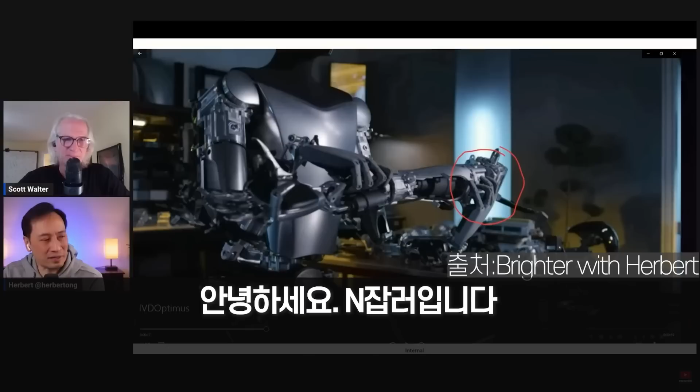인터뷰의 주된 내용은 테슬라 로봇인 옵티머스의 디자인과 실제 적용에 관한 구체적인 분석이었습니다. 인터뷰에서 스캇은 테슬라 차량을 만드는데 이미 테슬라봇이 쓰이고 있으며 2023년 말까지 500대 이상의 테슬라봇이 공장에 투입될 것이라고 예측했는데요. 오늘은 로봇공학자의 시선으로 바라본 테슬라봇의 디자인과 그 활용방식, 그리고 이로 인해 발생하는 엄청난 비용 절감에 대해 자세히 알아보도록 하겠습니다.

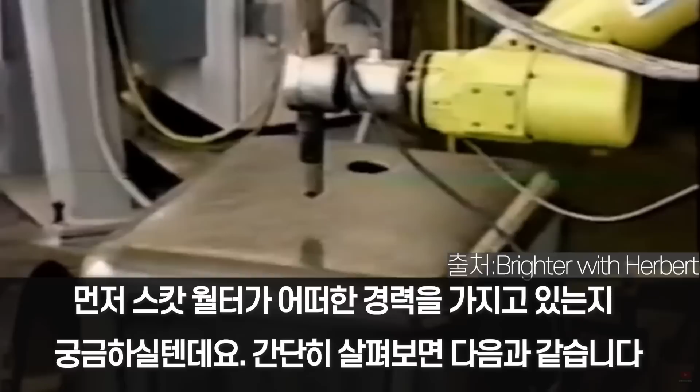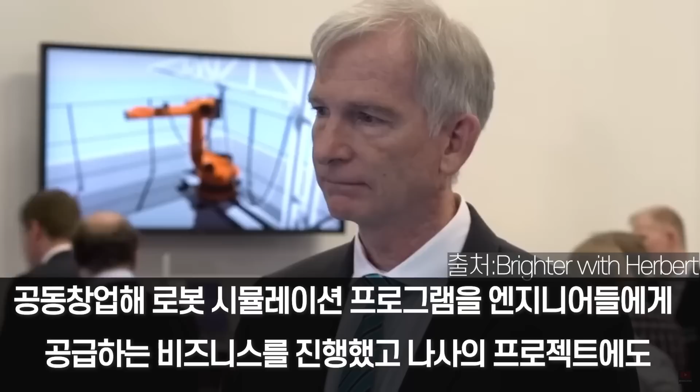먼저 스캇월터가 어떠한 경력을 가지고 있는지 궁금하실 텐데요. 간단히 살펴보면 다음과 같습니다. 스캇은 에어로스페이스 엔지니어로 기계공학 박사학위를 가지고 있으며 더넵 로보틱스의 공동 창업자로 초창기 로봇을 이용한 공정 설계 및 시뮬레이션 분야에서 선두자 역할을 했습니다. 스캇은 이후 비주얼 컴포넌트를 공동 창업해 로봇 시뮬레이션 프로그램을 엔지니어들에게 공급하는 비즈니스를 진행했고, 나사의 프로젝트에도 일원으로 참여해 자동화 로봇 기계 설계 및 개발에 많은 도움을 주었습니다.

인터뷰 초반 스캇은 자신이 만든 영상을 보여주며 테슬라봇은 많은 사람들이 생각하는 복잡한 작업이 아닌 영상과 같은 단순한 작업이지만 자동화가 어렵거나 사람이 접근하기에 위험한 공정에 사용될 것이라고 말합니다. 또한 그는 왜 이러한 로봇의 투입이 현재에도 이미 진행되고 있을 것 같은지 여러 가지 데이터를 통해 설명하겠다고 언급하는데요. 이와 관련해 인터뷰 진행자인 헐버트는 스캇에게 다음과 같은 질문을 합니다.

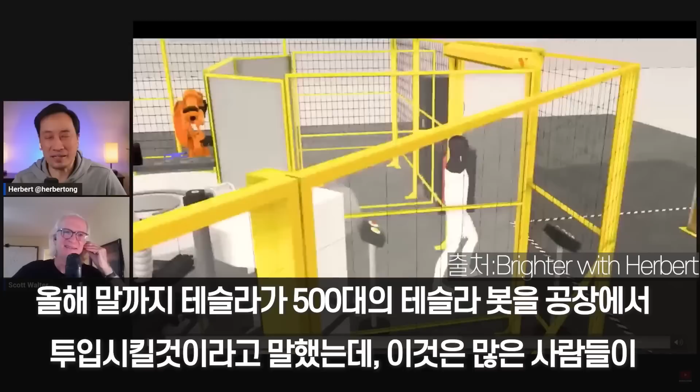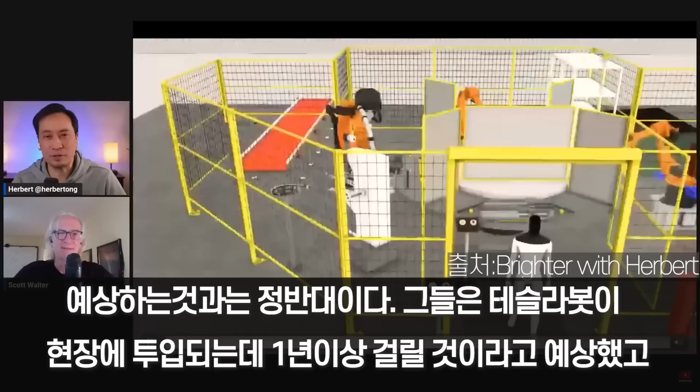You told me that you believe that today, that by the end of this year, there's going to be 500 bots, Tesla bots, and that they're already going to be starting in the factory. This is completely opposite of what many people have been saying, that it's going to take years. Don't expect the Tesla bot is going to be a business that's going to be available right away. Why did you believe this?

이에 대한 답으로 스캇은 이는 세 글자로 충분히 설명 가능하다고 말하며 FSD 때문이다 라고 말합니다. 그는 FSD가 발전하는 방식에는 다수의 차량과 이들의 주행 데이터를 필요로 한다고 말하며 테슬라 차량과 같은 FSD를 사용하는 옵티머스 또한 많은 데이터를 필요로 한다고 말합니다. 또한 그는 이렇게 주장하는 건 나뿐만이 아니라고 설명하며 랜디 컬키는 강의에서 1000개 이상의 테슬라봇이 투입되고 있을 것이라고 예상했고, 조 미나레토 또한 테슬라는 최소 100대 이상인 테슬라봇의 데이터가 필요할 것이다 라고 말했다고 전합니다.

You need a significant number to be able to get enough data on the operations of the robots, how to do it. Now, another thing which may be shocking is when I saw this, I put out a tweet saying that I want to reserve the first Tesla car to come off the line that had anything built with Optimus. And I'm afraid I might be too late. Not because someone else reserved it, but it might already be out there. What? It could be. I mean, there are so many operations. We may not know it. It could just be something simple. They just loaded a part into a machine and something happened and took it off, and that ended up becoming part of the car. So we may already have Tesla vehicles out there that have been built with Optimus.

이런 충격적인 얘기와 더불어 스캇은 테슬라 AI 데이에서 공개된 자료 한 가지를 보여줍니다.

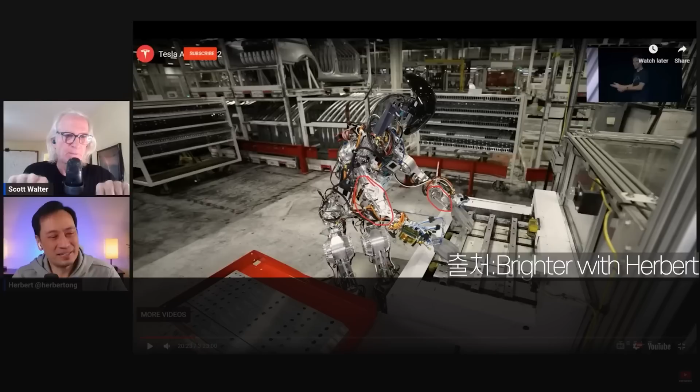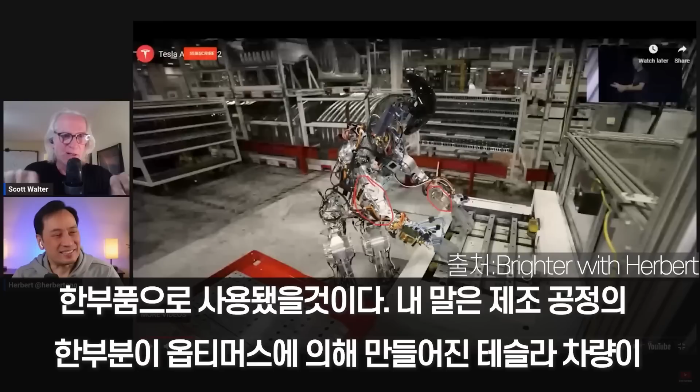Look very closely. I want to ask everyone in your audience, does that look like a laboratory environment? It does not. It's a factory, but you know, I mean, production. It looks like it's late at night. There's no one around there. They made sure no one could see, but they are testing this on the floor already. Do you see what's going on there? That is an actual production operation that has to be done. I guess those parts are real parts that is coming out of that machine, and Optimus has picked it up and put that on the red tray, and then that's been used somewhere else, and it has ended up in a Tesla. I'm telling you, there are already cars on the road where one of the process steps was done by Optimus.

또한 스캇은 테슬라 로봇의 구조적 디자인에 대해 자세히 분석했는데요.

특히 옵티머스의 팔에 달린 액추에이터를 주목했습니다. 스캇은 일반적으로 인간은 팔에 7가지의 자유도를 가지고 있지만 옵티머스는 6개의 자유도를 가지고 있었다고 말하며 손목 부분의 액추에이터를 어떻게 간소화했는지 궁금했다고 언급합니다. 그리고는 AI 데이 초대장을 보고 이를 분석한 결과물을 공유했는데요. 그는 다음의 영상을 보여주며 2개의 액추에이터로 손목의 모든 동작을 수행하도록 만든 테슬라의 기술력에 감탄했다고 말합니다. 그리고 이러한 제조 공정의 단순화는 옵티머스의 생산 비용을 상당히 낮춰줄 것이라고 추가적으로 언급했습니다.

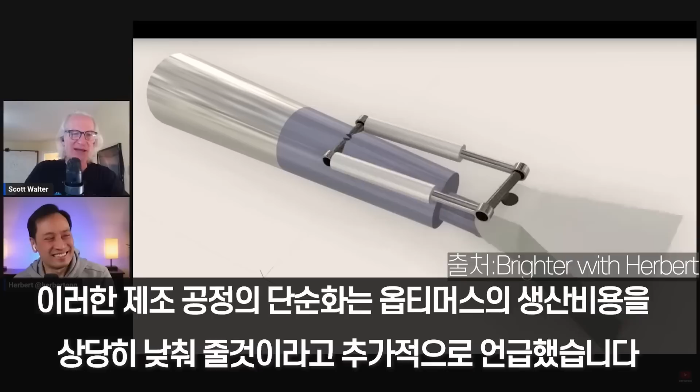또한 스캇은 옵티머스의 팔에 대한 설명과 더불어 손의 디자인에 대해서도 언급하며 다음과 같이 말합니다.

What's hard about a walking robot, a humanoid robot, is not the walking, but walking with a load. We've already solved, we can make a robot walk.

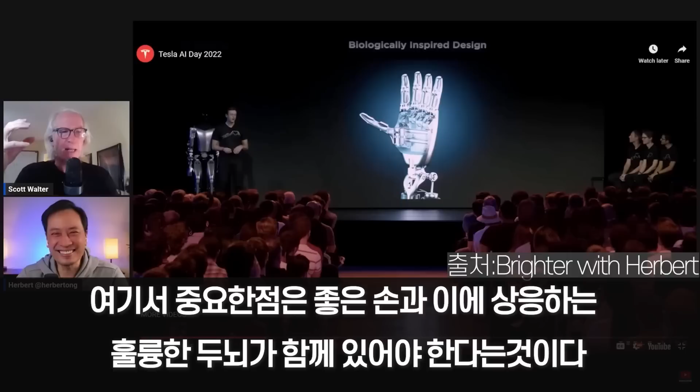And there are nice hand designs out there. Where are they? You don't see them anywhere. So they seem to work really well in the lab, but why haven't they come out? Right, the big thing is you need a really good hand and you need the brains to go with it. Once you get both of those things together, then you can do a lot of things.

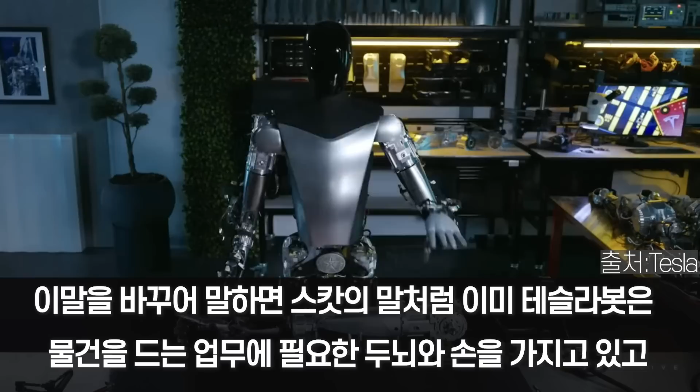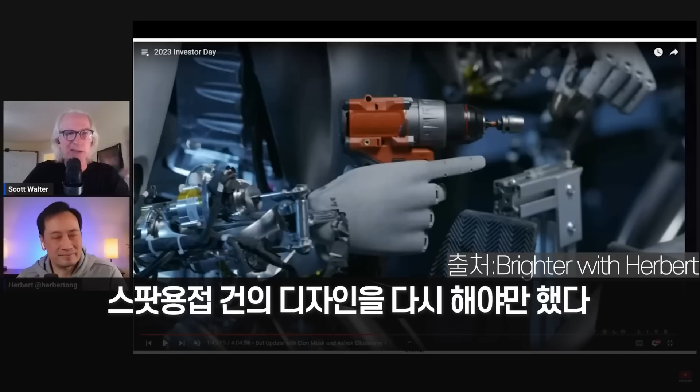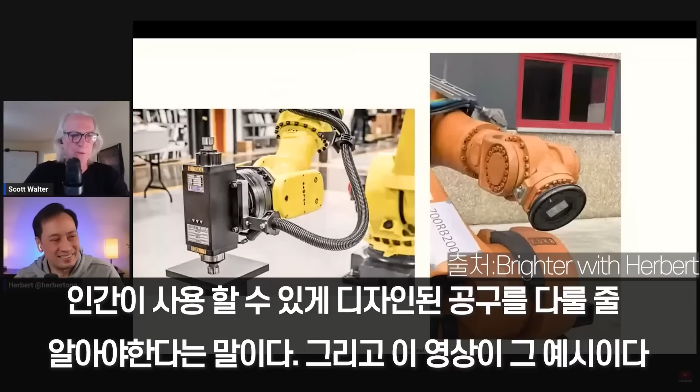So here we are able to see that it's able to pick up a tool designed for humans. The whole idea is it's going to go into work cells that are manual already, and there won't be any special tooling. Believe it or not, cars used to be built completely manually, there were no robots. So a lot of spot welding guns and stuff like that were designed to be manually operated. Then when the robots came along, they redesigned the spot welding guns for the robots, and guess what? Those spot welding guns you cannot use manually. So the whole idea is to avoid that situation where we end up having a cell designed for robots that humans cannot go into. They're going to be interchangeable both ways. Optimus can take over, the human can take over. So we need to make sure it's able to deal with human tools, and that's what we're seeing in that example.

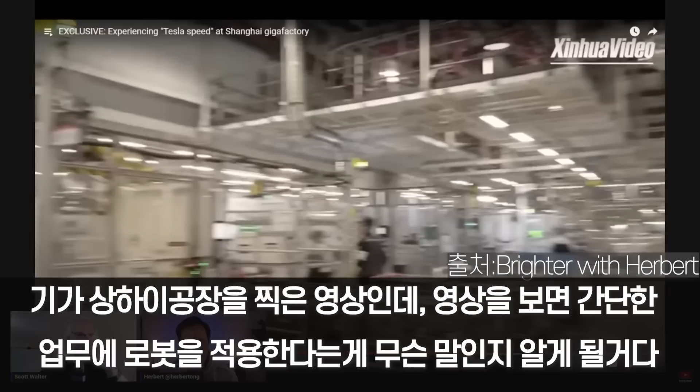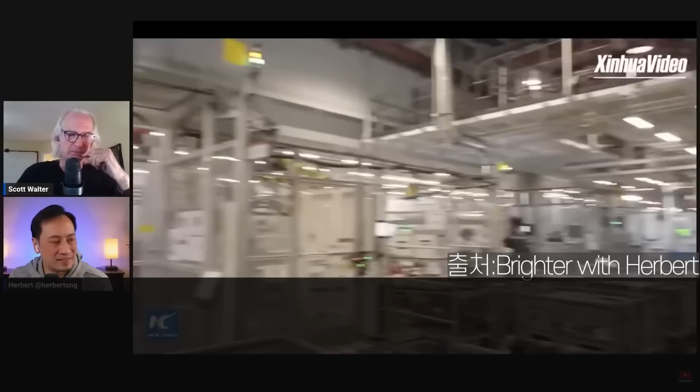Which was a great video that came out of China. Just look at this thing and you'll see exactly what I'm talking about — low-hanging fruit applications. So there's the robots. Now there's a cell back there where the robot has to take up two pieces of sheet metal and put it in the final location to actually be welded. But it needs to be fed these pieces of sheet metal. So the operator comes over, he has to wait for the light, he picks up one from each side because there's a left and a right, and he drops it on there and drops it on there.

Not with a whole lot of precision. It's very easy to drop it in place because the pins and everything make sure it's right. And the robot's going to pick it up.

Now look what happened right there. He made a mistake. He went in too quick. He had to reset the safety. He made a mistake, now he can go in.

Now in this case, he has to bring in one piece at a time because it's probably too heavy to do two. So he goes back, picks up another, comes back. He does that all day long.

And then you can see some other sort of simple operations. They just go on and on like that throughout the entire factory.

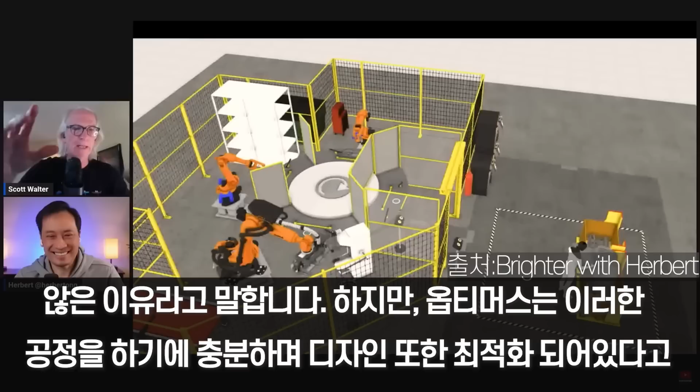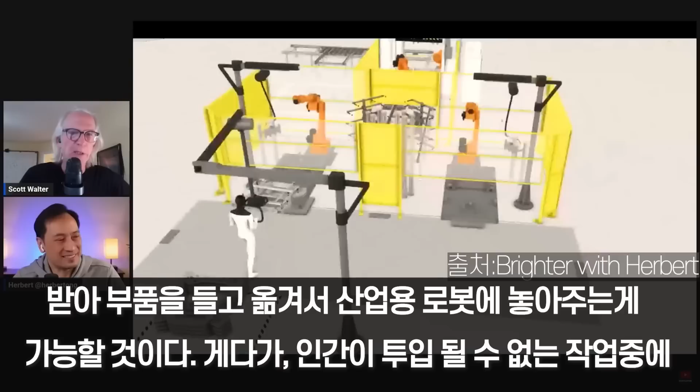What if the part is really heavy? Well, we have really heavy parts already and humans are able to do it, not because they're super strong, but because they have this lift assist. So Optimus is able to go over there, gets a lift assist, picks that up, brings it on over, feeds the cell, and then you get this turntable that brings it around.

And the other reason you can't allow humans to go in there is that if you have a welding cell with the arc going on, it's dangerous to be very close. So they have to have all the shielding around there to make sure your eyes don't get blinded from the arc. Optimus doesn't matter. You can walk right in there, walk around.

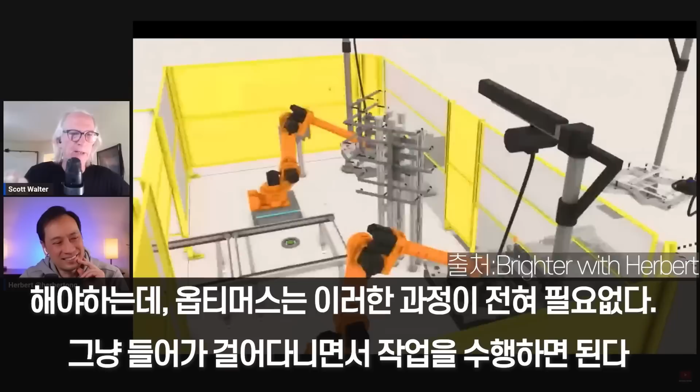Just take an example: if you have a worker on the floor and you're quote paying them $25 — remember, $25 is what they believe you are paying them. Now, you're not costing me $25, you're costing me at least $30 an hour because of FICA taxes and everything else. Plus there are overhead charges that could be anywhere from 25 to 40% for the facilities — break rooms, bathrooms, parking spaces, a locker, software you might need. All these other things are part of the cost of having an employee.

So if you just look at it right now, at $25 and 40 hours a week, working one shift for 52 weeks, that person costs you nearly $70,000 a year.

Yeah, for sure. But now you have, let's say, a factory that does 2 shifts. Go ahead and put 2 shifts in there. Yeah, we can multiply by 2, but don't forget overtime. So if you put in like 10 hours of overtime, that's time and a half, and you put all that stuff in there.

So if you have 2 workers with 2 shifts working 40 hours, and let's say they, on average, have an extra 10 hours of overtime a week, suddenly you're looking at over $200,000 a year in salaries for that. Now that means you would be willing to pay close to that for an Optimus.